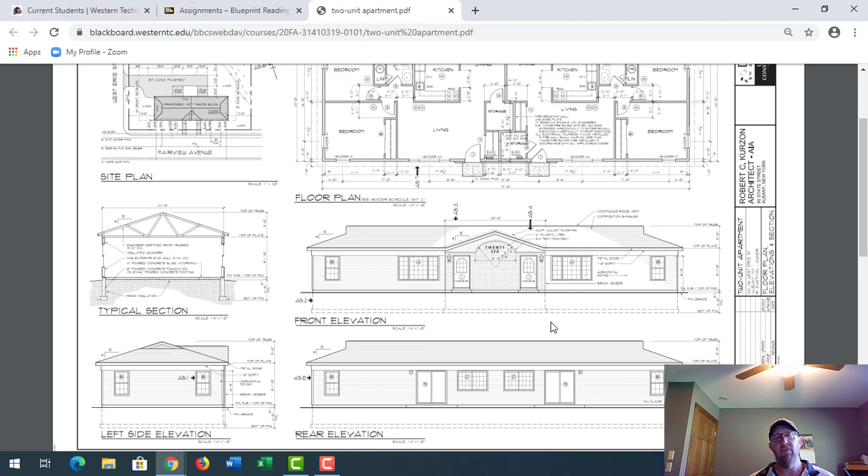So mentally you have to visualize these structures in your mind before they're built. And this is what we do when we're interpreting these blueprints. And so let's see how this corresponds. So let's say that I want to look at this side here, okay? And I want to know what the layout of this apartment is. So I know that I'm going to walk in the entry door here. So let's see what that looks like on the floor plan.

So I'm going to walk in the entry here, and it looks like I'm going to walk into a living room here. And there's a little dining area, and I got a little storage closet here. Here's a little L-shaped kitchen, and it looks like I've got 2 bedrooms with 1 bath in here. Okay, so I can physically walk around in these rooms and take a peek at what's going on. Not a huge building. And then I know in back, I want to know what this looks like. So it looks like I've got a window here and a window here.

And on this plan, here's a window, right? Let's go in the back. Looks like there's a patio door, a window, and another window. So it looks like I do have a way to use the patio door to walk out, if I want to do some grilling or whatever.

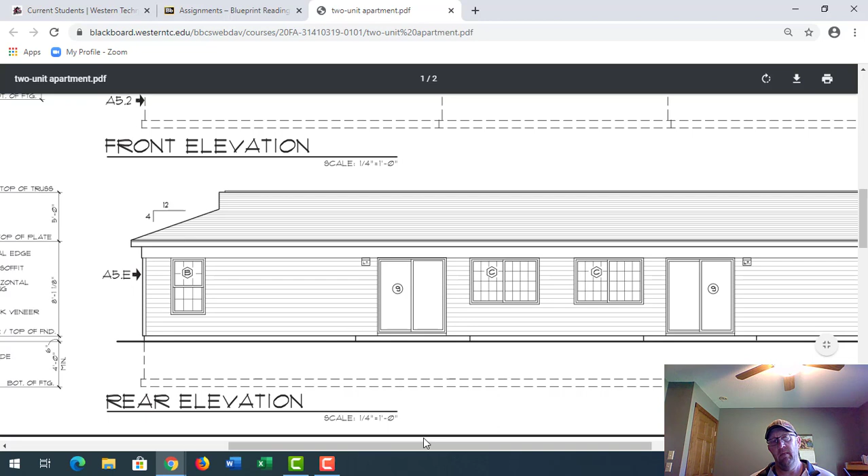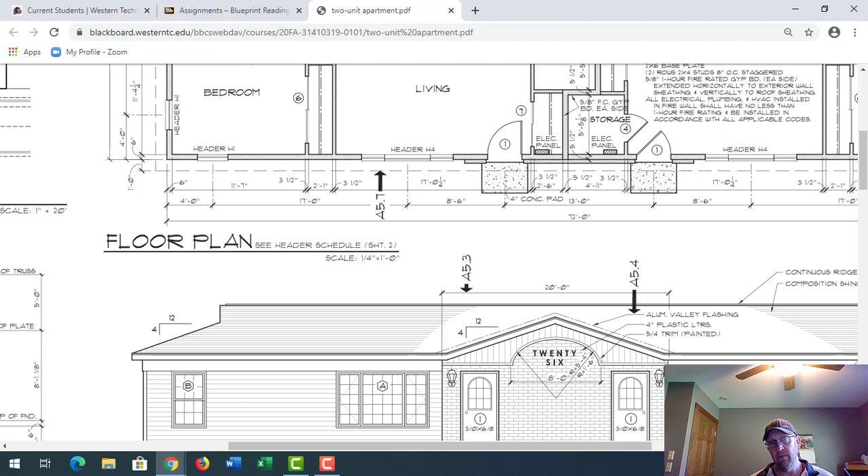So this is kind of what you guys should start thinking about doing. You're acclimating yourselves to what's really going on with the plans. You're visually walking around the building. You're mentally inside the building, visualizing the rooms. All right, so that's called orientating yourself to the drawings. Okay, so hopefully that makes sense, and you can kind of see how everything is corresponding here.

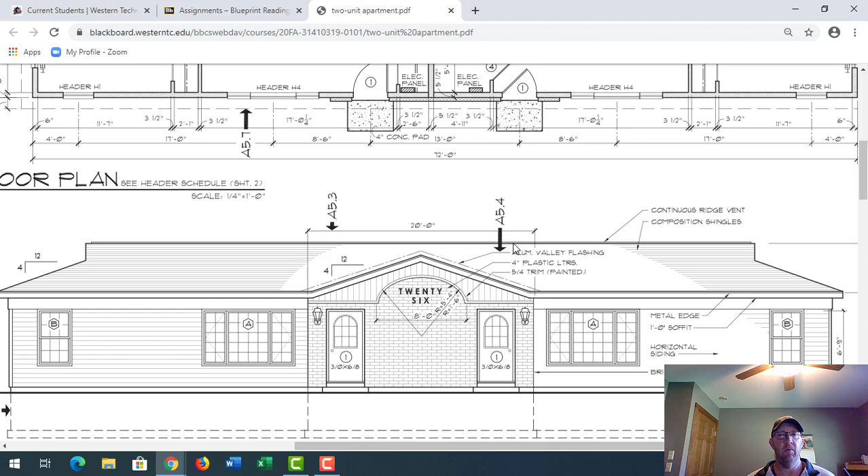All right. In Unit 8, we're focusing on sections and details. Okay, so now if I want more specific information, and if I want a little bit better view of certain things, that's where you're going to go and see your section or your detail. So on this particular plan, I'm going to show you a couple of areas where you can see that. On this sheet, first of all, we have a section view here, and I've shown you guys this before.

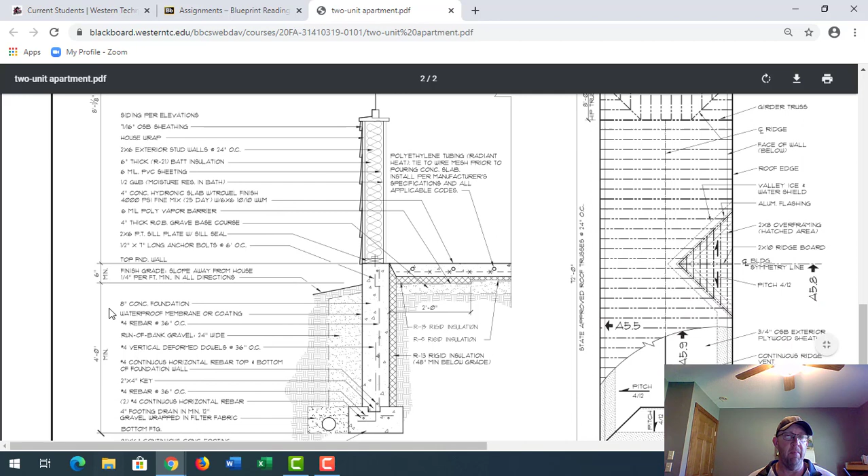Lots of information all the way from the footing on up to the roof, okay? All these leader lines are pointing to different things, so you can figure out what's what. We also have some dimension lines here with some heights listed. All right, so notice the scale: 1 inch equals 1 foot. So the scale is a little bit larger than our floor plan scale, okay? Here's a roof framing plan. That's just a plan view.

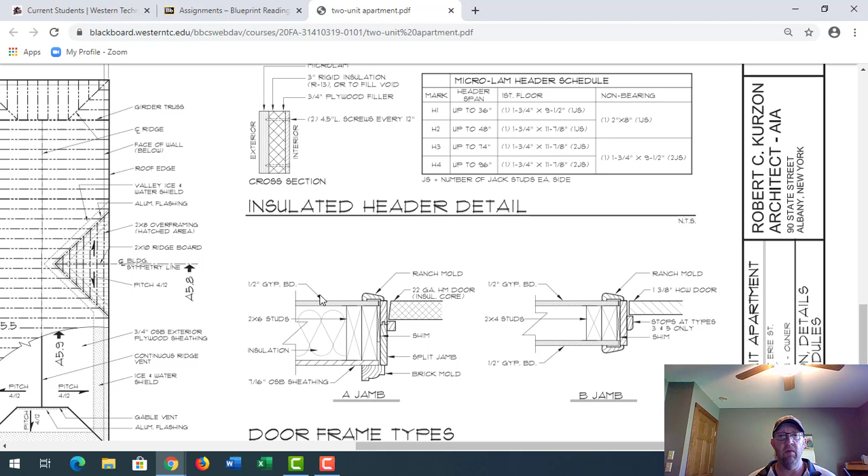But what I wanted to show you guys is here's some header details and door frame types and details. These are things you're going to see on blueprints, oftentimes blown up. So here we have a scale of 3 inches equals 1 foot. What we're looking at is different door jambs, viewed from the top down, okay? So this is basically a picture of what the front door would look like. And this picture here, the B jamb as it's listed, is a picture of what the interior walls would look like.

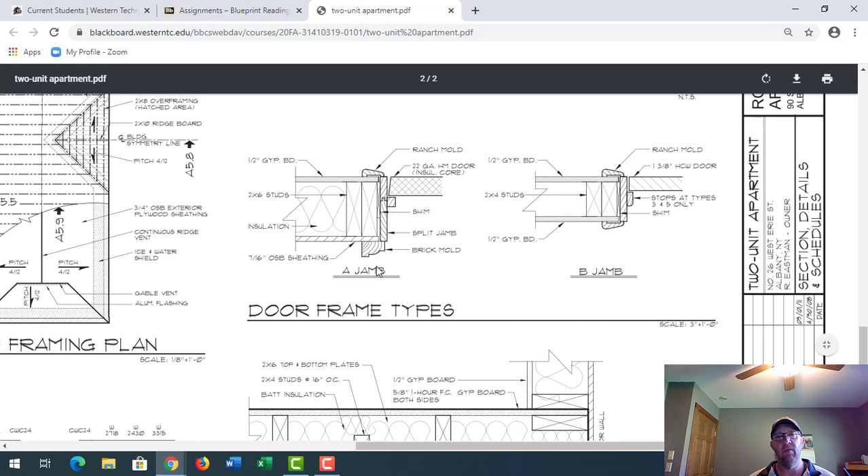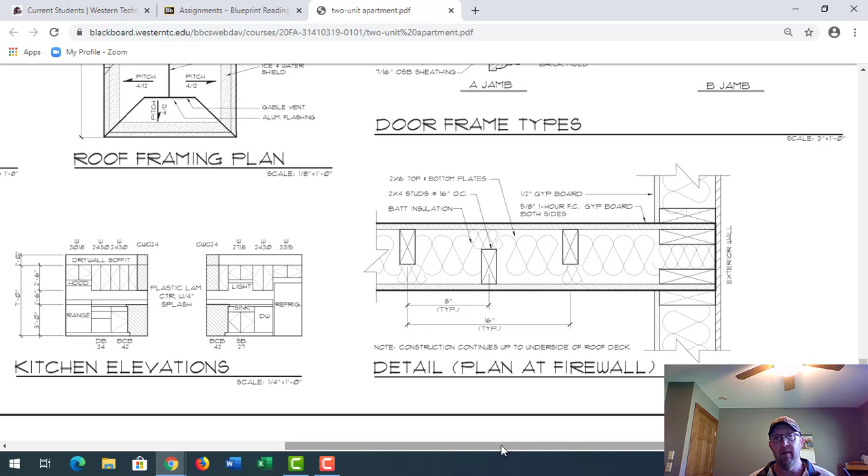Notice you have ranch molding on both sides. That's a sure giveaway that that's an interior detail. And this is an exterior detail because there's brick mold. Brick mold's usually something you would see on the exterior of a house. Here we have a detail plan at the firewall. Another thing that's blown up, 3 inches equals 1 foot, and that's going to tell us some information on our separation wall that's in the center of this 2-unit apartment, okay? This is what's separating the 2 units. So we've got some details there that we would have to look at when we're framing.

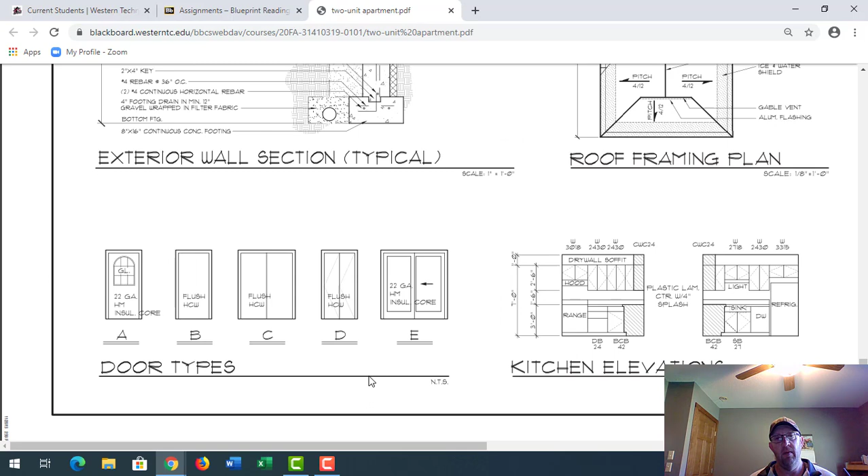And if you slide over here, we've got a bunch of kitchen elevations. Notice this is an elevation view. So again, I could be standing in a certain area of the kitchen and figure out where my cabinets went and what size my cabinets are. Okay, so this is another detail that's kind of neat. It allows me to figure out my cabinet sizes, the heights of the cabinets, and I can visually have an understanding of what it might look like. Then we've got some door types here. NTS, that means not to scale. It's just showing us some door types.

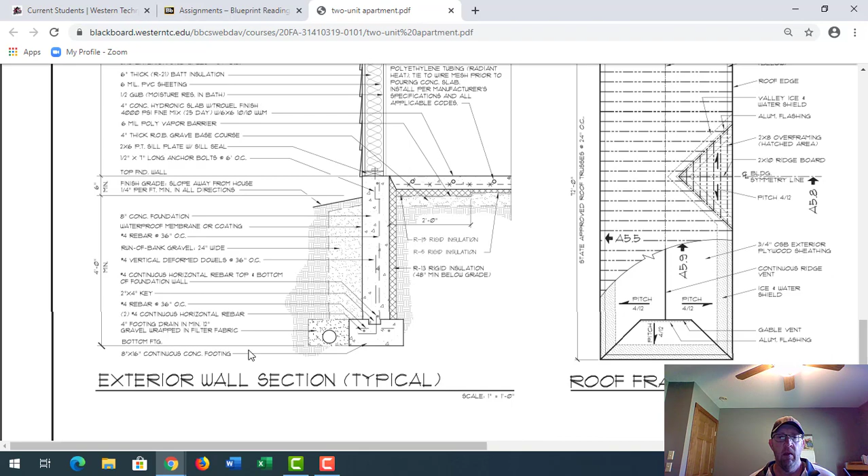So as you can see on these plans, we've got sections and details, and there's a lot of different information that we can get as we get more into the plan, right? If I needed to know the information about the cabinets, now I can go in there and get a little bit more detailed as to what I'm looking at, okay? So the floor plan is going to show you the layout from the top down, but the kitchen elevations are going to show you what the cabinets look like as if you were standing right in the room, okay?

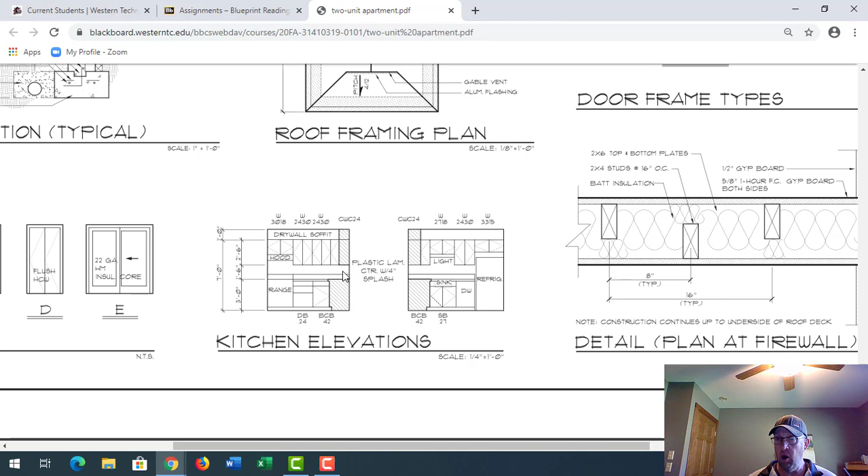So that is called orientating yourself to the drawings and getting a little bit more information on sections and details. All right, so look at your plans like that, guys, and know that that type of information is going to be very useful for us as carpenters when we go to those different portions of framing or finish work, okay?